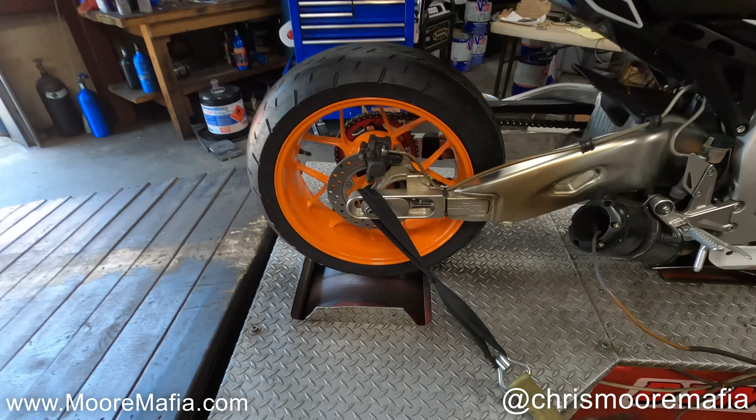Shinko Stealth tires are good tires. They hook up good on the street. They last pretty decent, but they are not very dyno friendly. What we mean by dyno friendly is they don't turn the drum as well. Shinko Stealth, any of the drag related tires, are soft compound and they actually slip on the drum.

So the way the dyno works is a dyno simply just measures how fast your tire turns that drum. That's pretty much how they work. There is no super secret science to it. That's how it measures the horsepower.

This rod you see going into the exhaust pipe here is linked to my O2 sensor, and that is what tells me how rich or lean the bike is running. Based on how rich or lean the bike is running, I make my adjustments in the ECU to compensate.

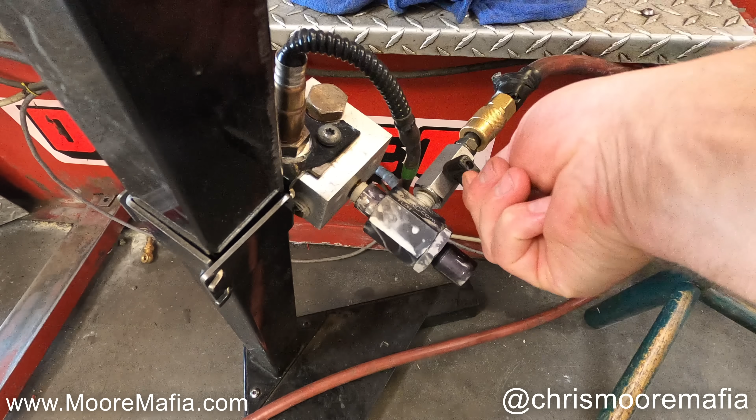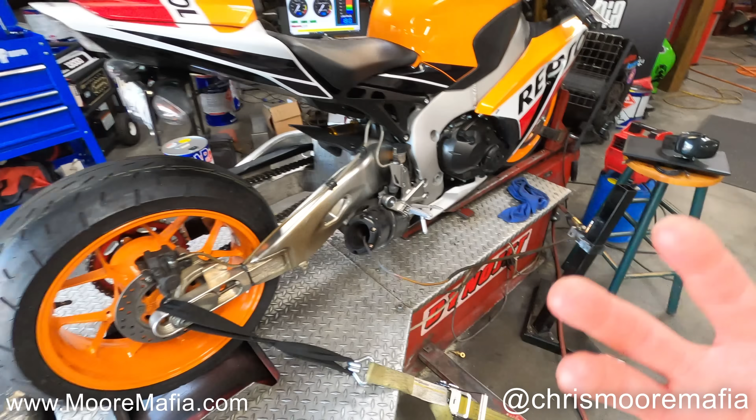This hose that you see me turning on and off is an air supply for the O2 sensor. What that does is pull a vacuum from the exhaust. In other words, it sucks the fumes out through this rod into that sensor. That way the O2 sensor gets the purest reading possible.

So this bike has a Power Commander 5 on it. We're going to be zeroing that Power Commander out, which is basically the same thing as taking it off. They're going to take it off when they get home. And we're going to be flashing and tuning the ECU in these bikes. These bikes do have restrictions in them holding them back. So we're going to open up all those restrictions and see what kind of gains we can get. Stay with us, guys. Here we go.

All right guys, here we go. Baseline pull. Just a note too, the owner has said this thing has been previously dyno tuned through the Power Commander. So this is going to be a good example of seeing what, well I don't know if it's a good tune or not, but what a tuned Power Commander does up against the ECU Flash.

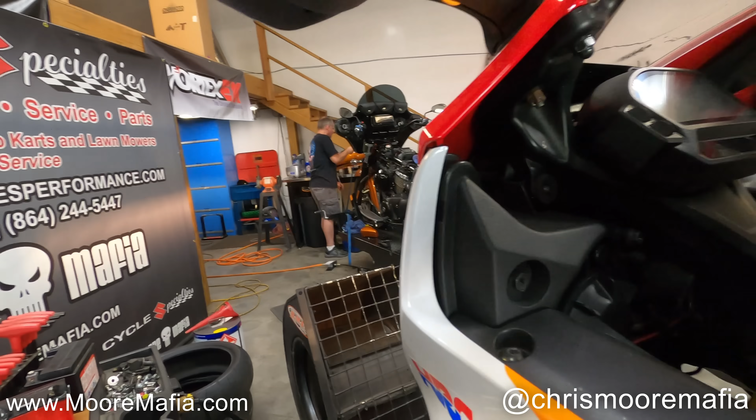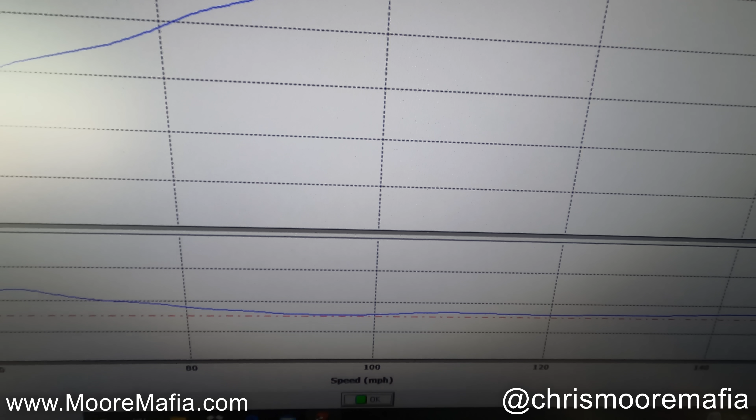The tune did a really good job. The air fuel ratio is nice and straight. Since our horsepower is not any good, 143 horsepower, that's pretty weak. So we got to find some more power in this thing somewhere.

All right guys, this is the first pull with the new ECU Flash. I plugged into the Power Commander and cleared out all the settings in it, so the Power Commander is no longer doing anything. Let's see if I can beat this Power Commander tune. The tune was actually really good, so whoever did it, thumbs up to you. Let's see what we can do with this ECU Flash.

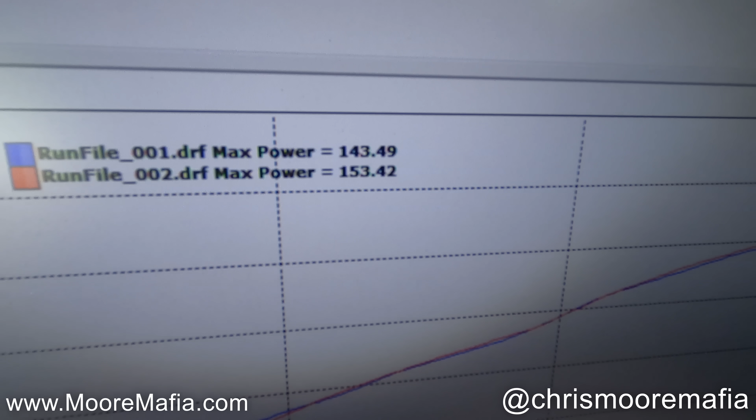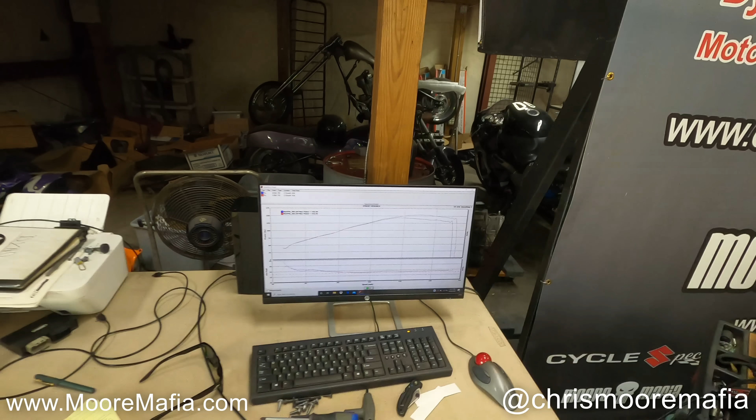Guys, here we go. We've about got this ECU flash dialed in. I'm going to hold the camera this time and kind of take you on a ride on the dyno, and let's see what it's like riding along.

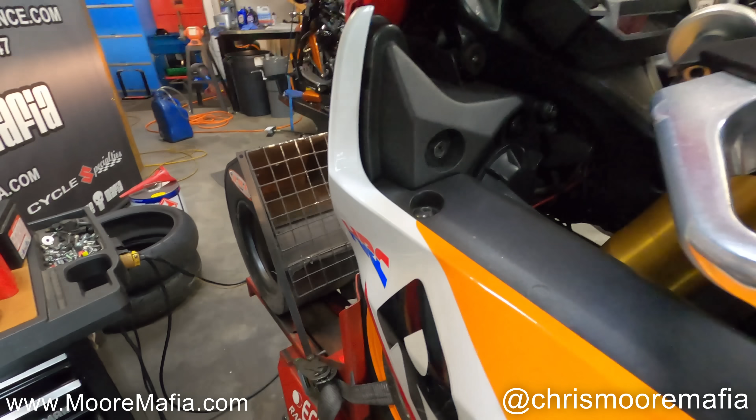All right guys, so I know you've heard me complain about the Shinko tires in the past. This is a perfect example of how that Shinko robs us of horsepower on the dyno. If you go back and rewind just a second and listen to the bike, you'll hear it go oh, oh, oh. Basically that was the bike spinning, then catching traction, spinning, then catching traction.

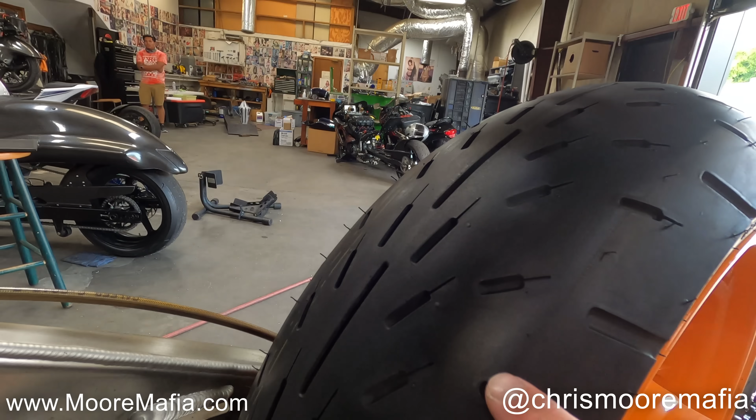It's all doing that just because of the compound of the tire. You can see the tire, how shiny it is. That shininess is showing us it's spinning, it's glazing the tire over.

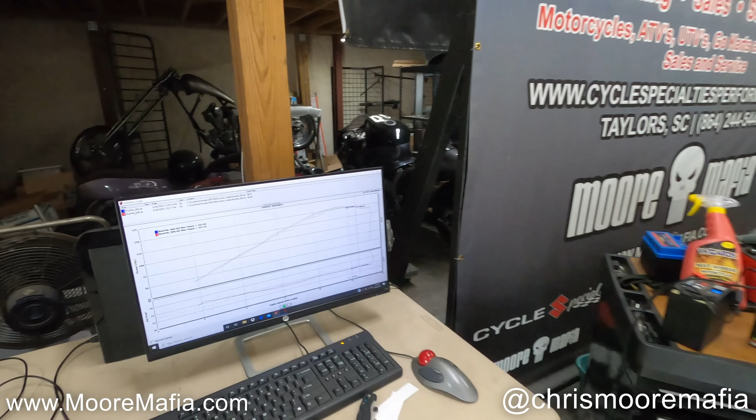Right as I'm touching this, let me see if I've got one, guys. I might not. Mike, you have a temperature gauge, an infrared? We're gonna show you the temperature of the tire, how hot that tire is getting.

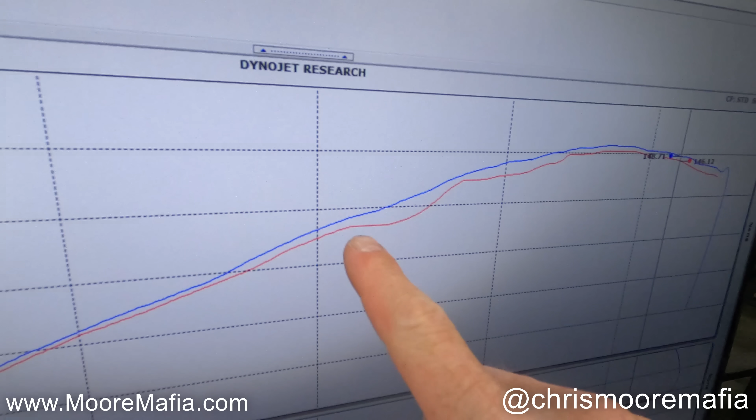So we made 153.96 a while ago, and then now you can see as it's losing power as the bike is spinning the tire. So this right here, spinning, that's where it lost traction. So we're gonna have Mike shoot the temperature of the tire.

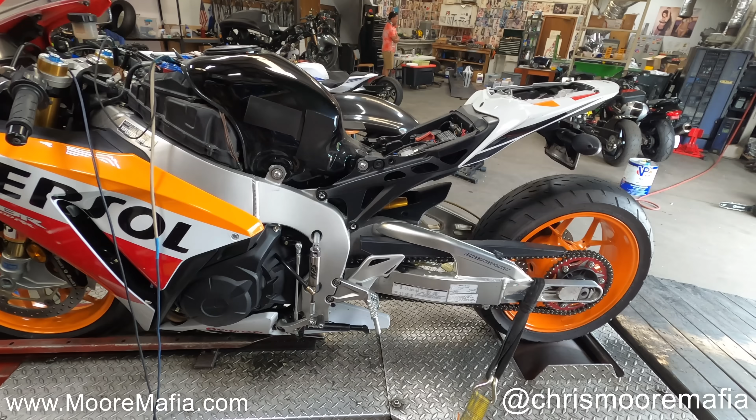134 degrees is the tire temperature, and that's just from a dyno pull. It's been sitting for, I don't know, 30 seconds to a minute, which doesn't sound like a long time, but that's a good while for the tire to cool down.

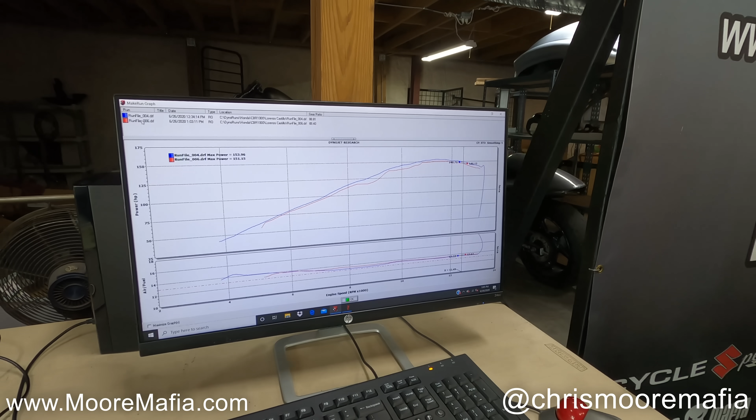So anyways, you can see our tune is dead on the money on the bottom, nice straight line, but our horsepower is varying with this tire. So I'm gonna make some changes to the tire pressure and stuff and see if we can get that to grip a little better and stop spinning.

All right guys, so we made a tire pressure adjustment on this thing, readjusted the straps a little bit, and we let it cool off. I didn't change the tune any at all. Let's see how it does now.

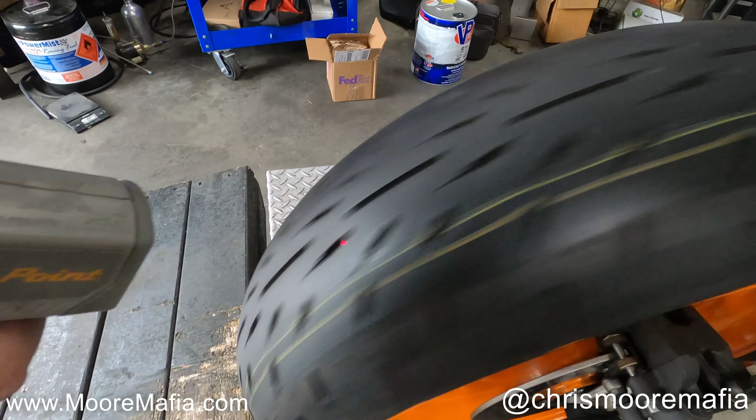So it's still spinning. We're going to take it off the dyno, do a burnout with the tire, break in the new tire, and see what we can come up with once we scuff this tire in.

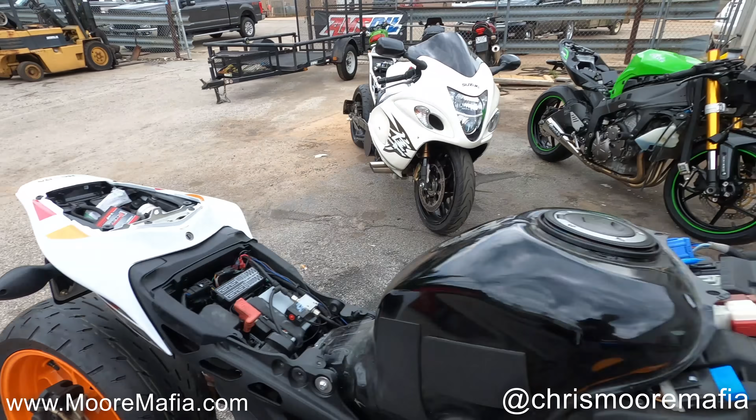All right guys, here we go. Let's scuff in this new tire. See, this thing still has the lines painted on it. We got to get rid of that stuff. A little breaking in the tire.

Didn't take too terribly much. We just got it nice scuffed in now. It doesn't look all shiny like it does over here on the side. We got some texture to it. So we're gonna let it cool off, put it back on the dyno, and see what we got. All right, guys, let's see how she does after the old smoky.

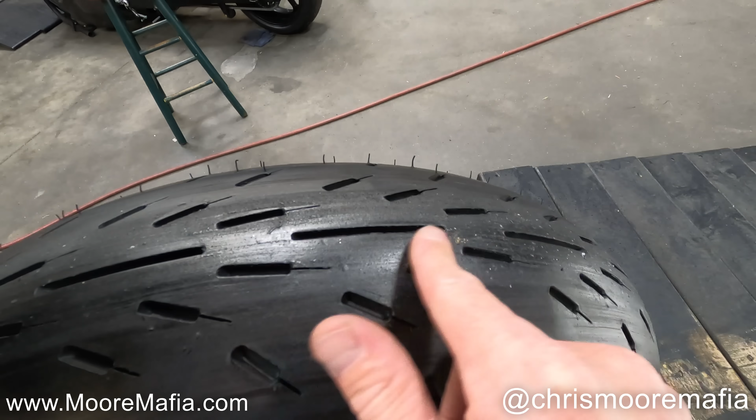Alright guys, so we ended up just tapping out with the CBR1000. This Shinko Stealth really threw us for a loop. You can see how shiny it is. Well, all that shininess is from where it was spinning the tire. No matter what we did, tire pressure up, tire pressure down, straps tight, tighter, tightest, no matter what, it would not hold traction. So once the tire got hot,

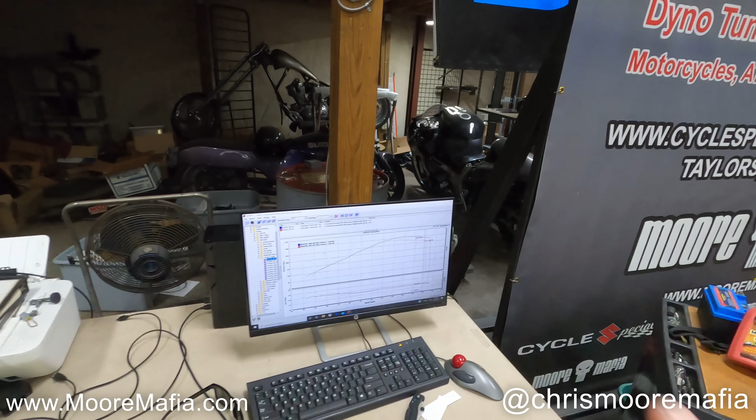there was nothing we could do with it. So anyways, you could hear it in the videos, and that's what the horsepower was doing as well. So I ended up pulling up the best run with traction, and then I ended up pulling up the very first run just so you could see the difference.

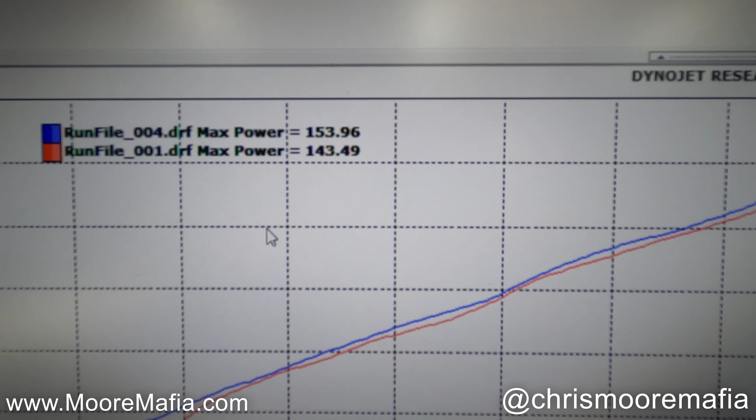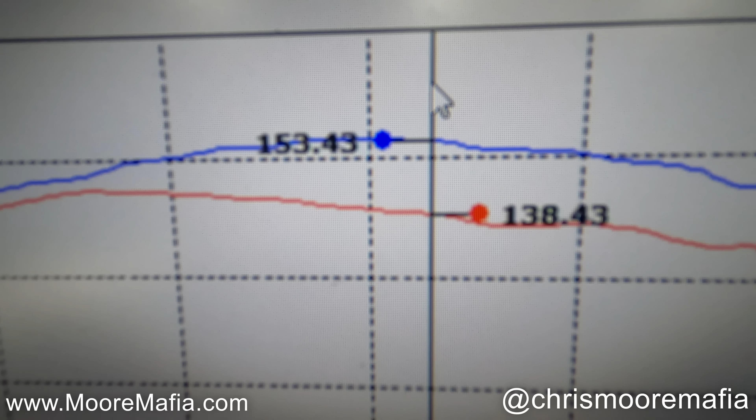We went from 143 to 153, but if you look at where we made the 143, the 49, the highest horsepower is here, but we actually carried it on out here with the ECU Flash. So here we went from 138 to 153. So that's a huge gain.